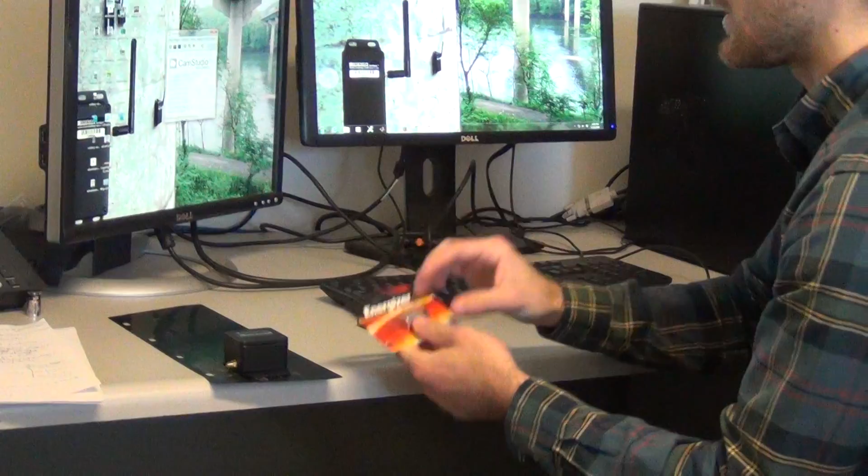First, we have our Resensys wireless SenSpot sensor, an Energizer lithium CR2 battery. This is the specific battery that goes into the SenSpot sensor. If you'd like to learn how to change or remove one of these batteries, you can look at our other video on the playlist. And this is an antenna that goes onto the SenSpot.

You have to be careful of the polarization. This is a female port, and this is a male port on the SenSpot. You want to make sure that you have a male to female connection, otherwise it won't work. So here you can just see that I'm screwing on the antenna, and I'm just going to raise it once it's screwed in. Now once that's done, we are ready to open the SenScope software.

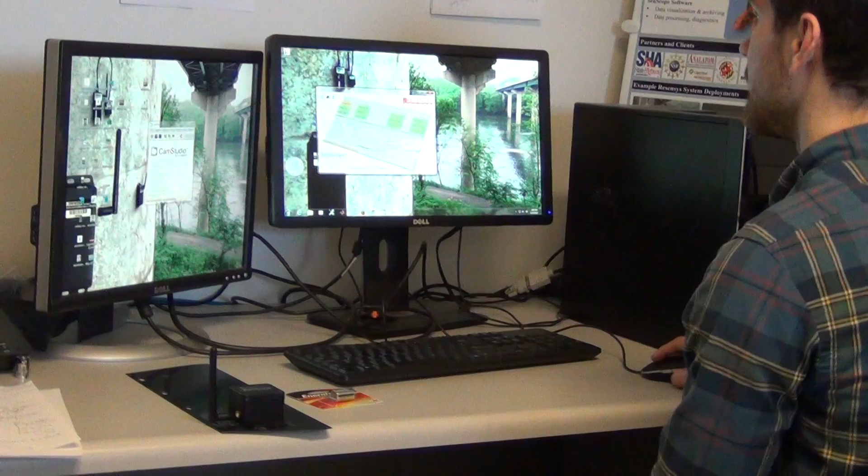By double-clicking, the title screen comes up. When working in live mode, we don't have to worry about logging in with any credentials. And also when working in live mode, we want to make sure that we have the licensing USB dongle and the USB sink dongle connected to the computer in the USB ports. Once we've made sure that everything is in order, we go to the second button, and that's the live button.

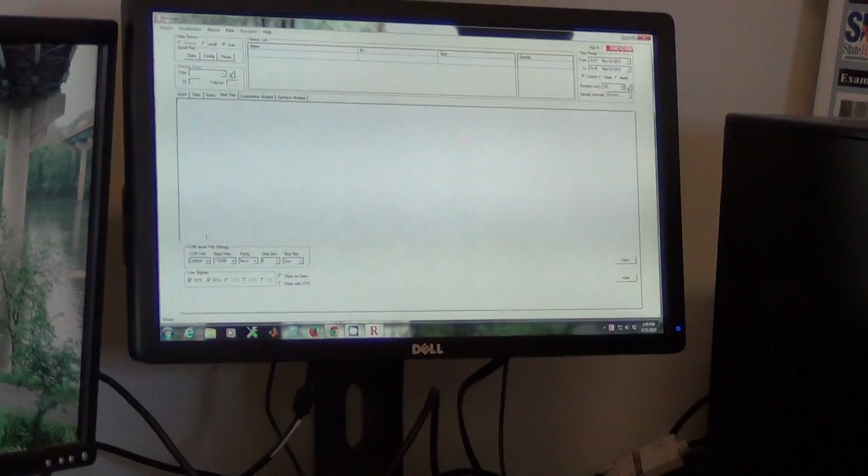Once SenScope opens, in the data source menu, we click on live. We want to look at the bottom and look at the COM serial port settings. The COM port is usually selected by the software. It usually selects the default, but in case you have multiple devices connected, you'll just have to select the appropriate COM port. The baud rate, parity, data bits, and stop bits should all be set to the default settings that are there when you open SenScope.

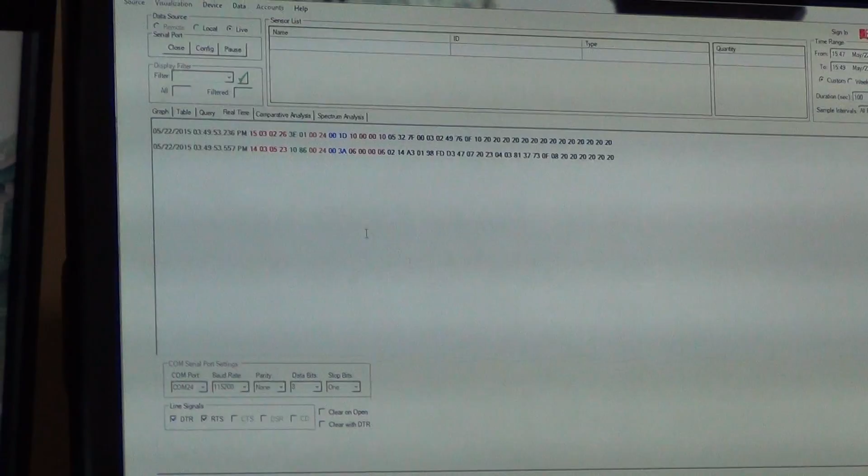Now we're ready to open the serial port. Here we can see data being captured by SenScope, and we will just go directly to the graph menu so that we can look at some data. Now here I am at the graph menu. I want to select the specific SenSpot that I'll be looking at from the top menu. I can do this from the ID numbers, so I'm going to look at the SenSpot that we have, and you can see that on the top plate there's a sticker that has the SenSpot ID number.

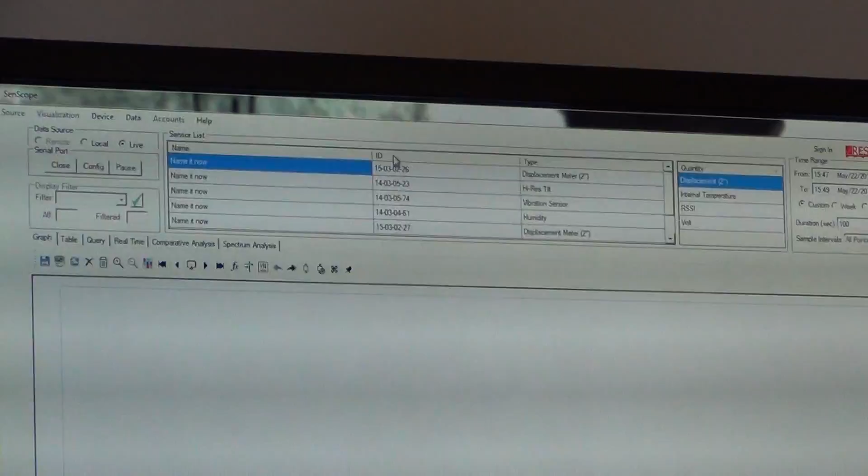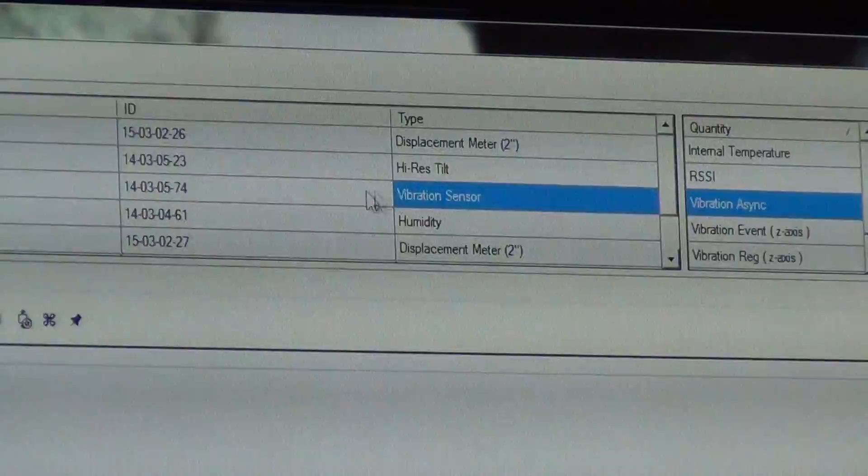We can see that the ID number is 14030574. Now I'm going to look for that exact same ID number on the ID list. Now here I see 14030574, and I can also see the type of SenSpot that it is, and it's a vibration sensor, and that's exactly what we want. Now we're going to be looking at vibration async. I'm just going to highlight that. You can highlight any one of these quantities, but we're going to be looking at vibration async.

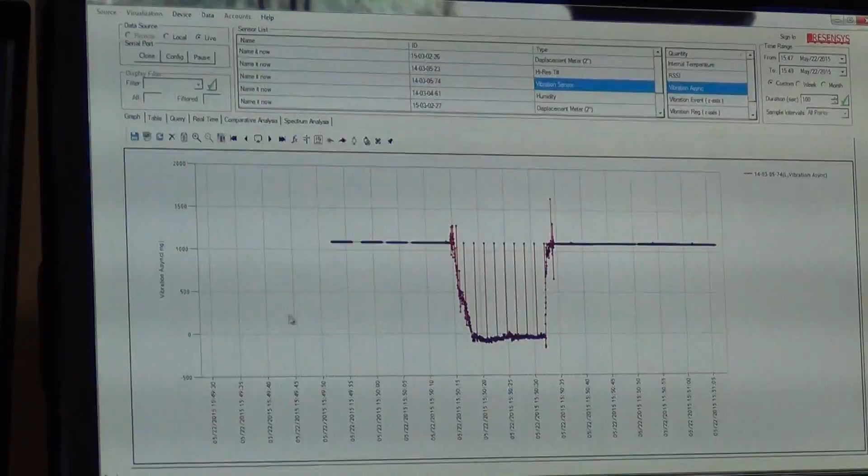Now I can add the chart by pressing the Add Chart button. This captures the acceleration, and the units that it captures are milli-g's right here. Now this is a live tracking of the data being sent from the SenSpot, so I'm going to just make it send a little bit more data. So I'm going to put it through a little bit of vibration right here. And you can see that data being instantly captured on the screen.

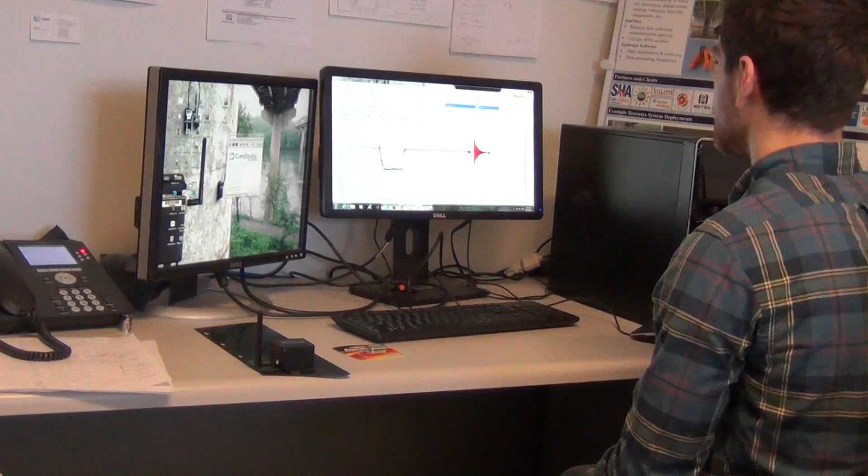Now if I'd like to zoom in on any set of particular data, I want to pause the screen, keep it from moving, and here I will just press zoom in. Once I press zoom in, I go over to the data that I want to see, and I just left click, and highlight and drag and drop. And here I see the vibration that the SenSpot went through.

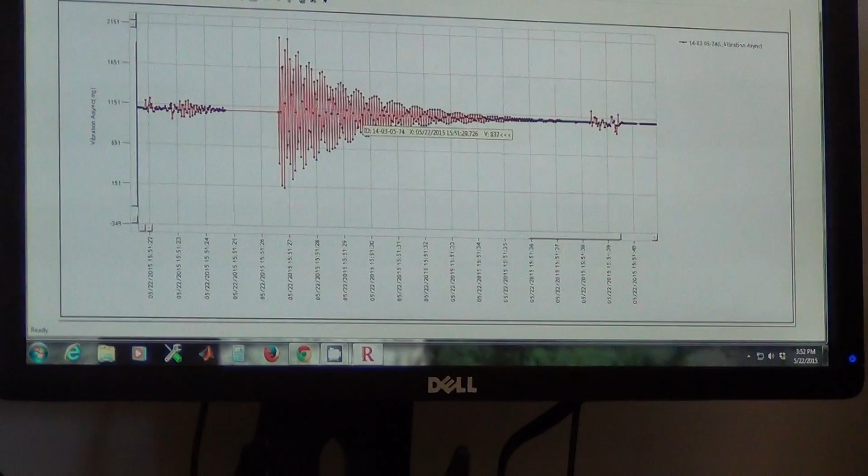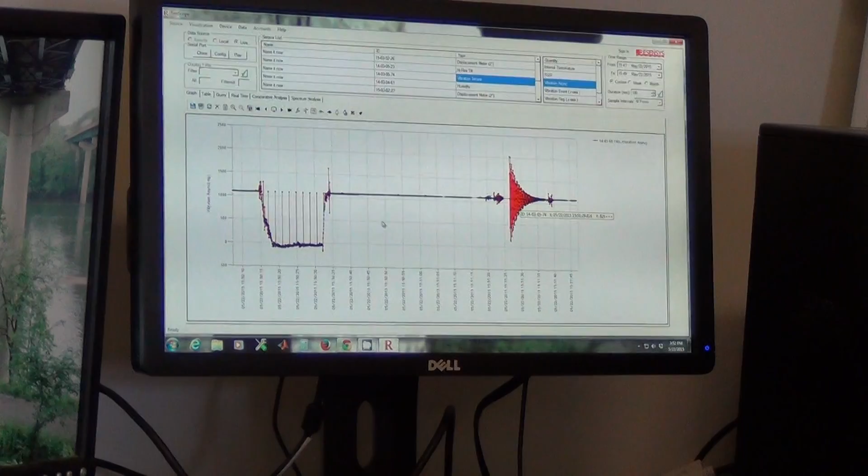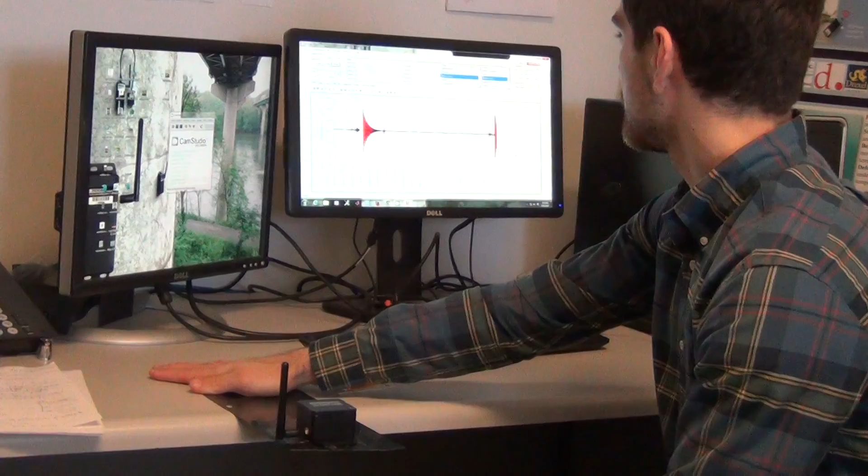Now if I want to see the big picture again, I just press zoom out, and here's the big picture. And if I want to see some more live transmission, I just go back to play. Now once I've clicked play, it jumps back a little bit because I haven't done anything with the SenSpot for a little bit. If we want to see some more data, I'll just make it go through a little bit more vibration. And that data is being instantaneously captured onto the screen. I'll just send a couple more.

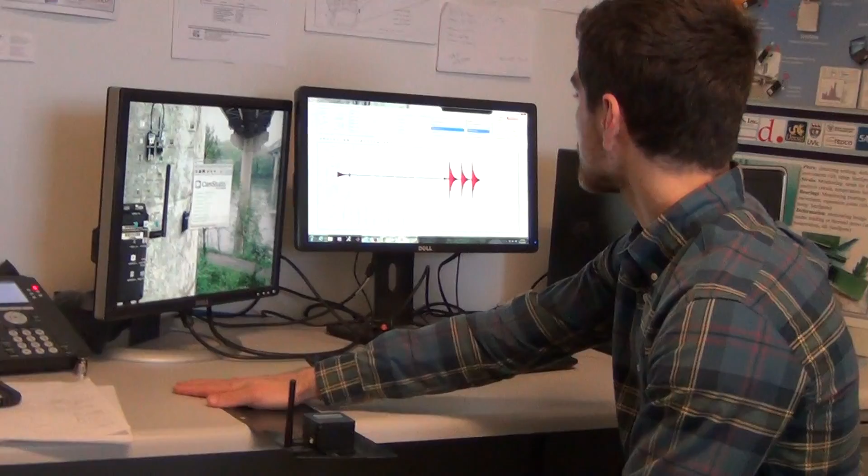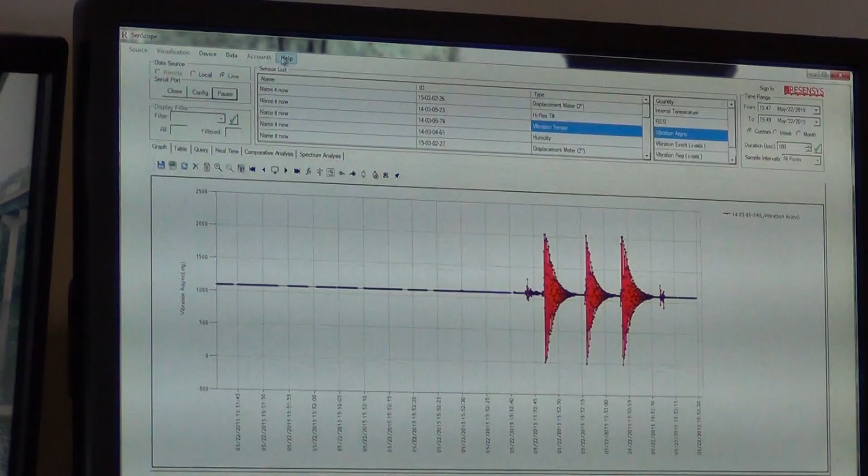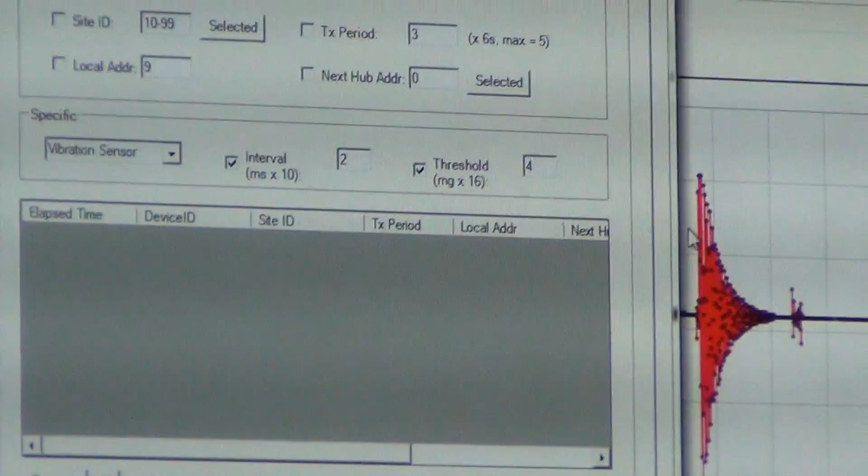Now that I've seen the data, if I'd like to change the sampling interval or the acceleration threshold, I go to the top icon buttons and I click Device, Air Update. Now the sampling interval is set at 60 milliseconds. If I'd like to change it to another multiple of 10, I just click the box, and if I want to set it to 20, I'll just put 2. And the threshold is set at 80 milli-g's. If I'd like to change it to, for example, 64, any multiple of 16, I will just make it be 4. Now if I want to apply those changes, I just press apply.

I see a yellow highlight. I want to wait until I have a green highlight. I see the green, that means I'm ready to go. And I just close the air update. And that is the totality of this tutorial.